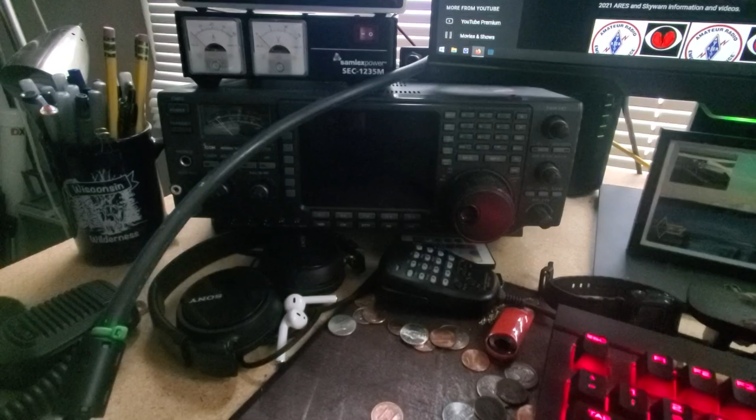Look at what I got, a RigExpert AA55 Zoom. Let's take a closer look at her. Maybe have some fun. Intro video.

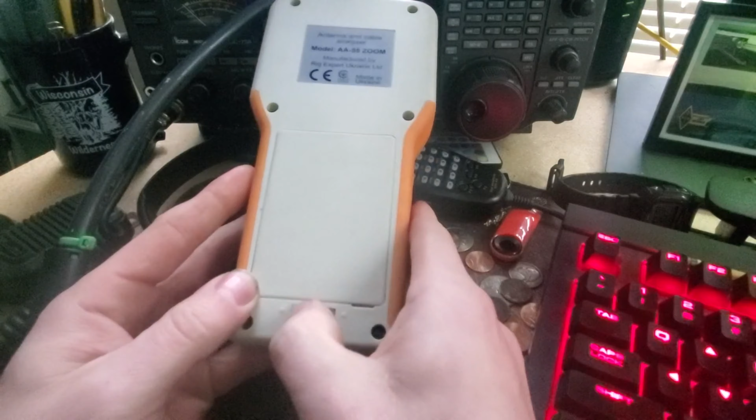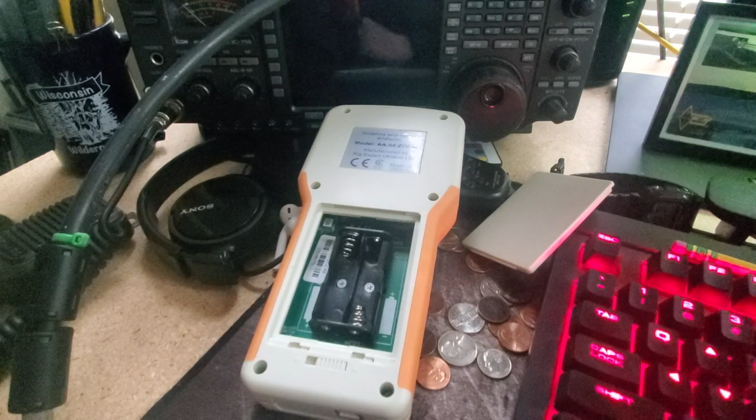Okay, so the first thing I'm going to do is replace the batteries in here. She runs on double As, which is great, everybody knows how much I love me some double As. Today I'm using the EBL lithium ions, 3000 milliamp hours. So we'll get those in there.

There we go. Next, turn around. Nice, beautiful screen there.

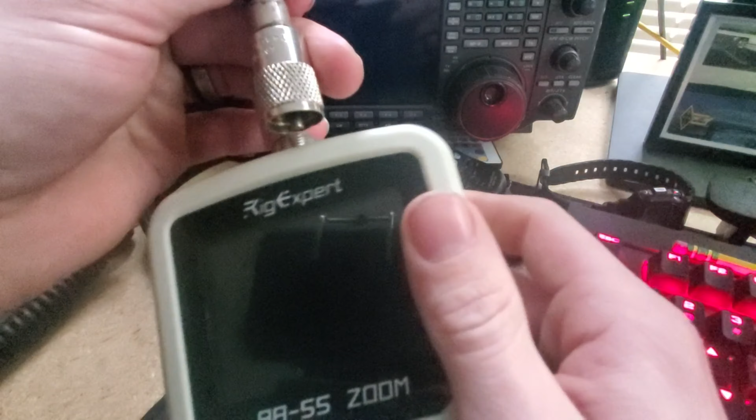The easiest thing to do with these is check out the SWR meter. So, nope, wrong button, power off. There we are. I got my off-center fed dipole on this here coaxial cable. Alright, so got the coax hooked up there. Turn her on.

Beep a beep. You have an SWR. Well, there's a lot of different options in here. You got a Smith chart, if you're super smart and know what that is and how to read it. You got an SWR chart. Let's take a look at that.

What's going on? Yeah, okay. Under the SWR chart, you're going to hit frequency range number 3. And it's pretty cool. What are we doing here? Range, frequency, F for bands. And F is down here. There you go. And that, oh no, you gotta hold it. And that's gonna highlight over here, and you can go down to pick whatever band you want.

I'm gonna start with 6, which is 52 megahertz with a 2 megahertz split, which maths out because you start at 50 megahertz and you go up to 54 megahertz, but 50 to 50.1 I think is CW, and all that jazz. So we're gonna hit check for enter, check for start, and it's gonna plot right there.

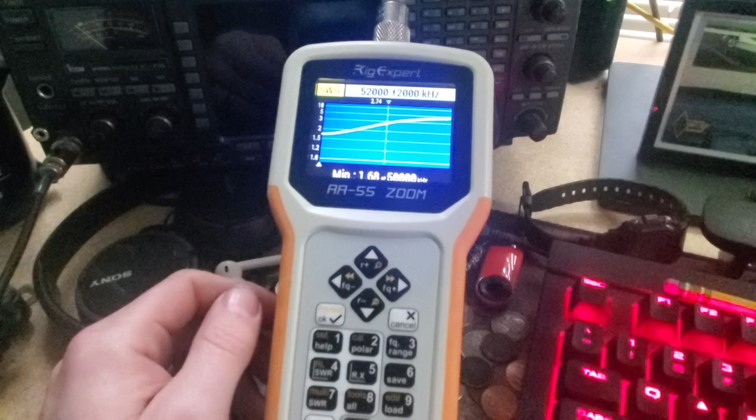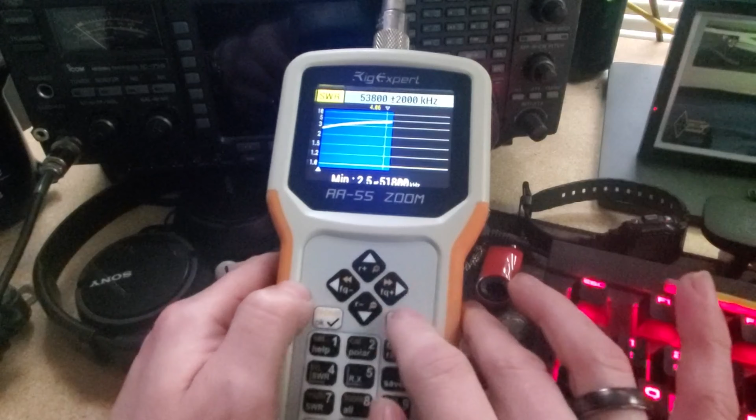Look at that. And that tells me that my off-center fed dipole is not really all that great on 6 meters. Usable maybe down here in the CW portion. I'm getting like a 1.6. Usable portions, it gets pretty high, almost up into the, yeah, that's unusable, man. But that's okay, just showing you how it works.

So how do I back out of here? There we go, I hit F3 for frequency range again, and then F to highlight there. We'll check it out on 10. And there we go, 10 is 28 to 29.7.

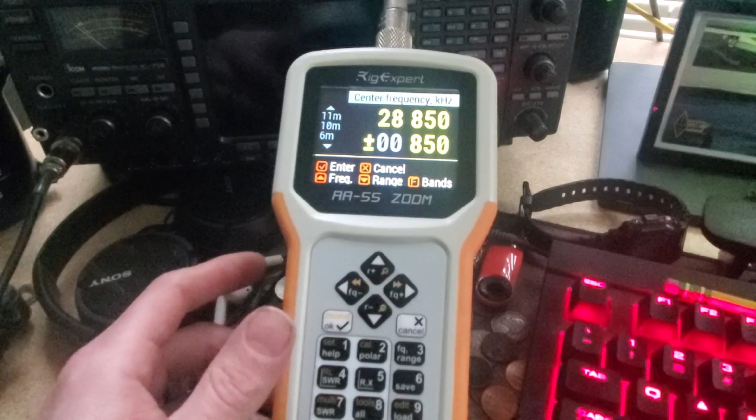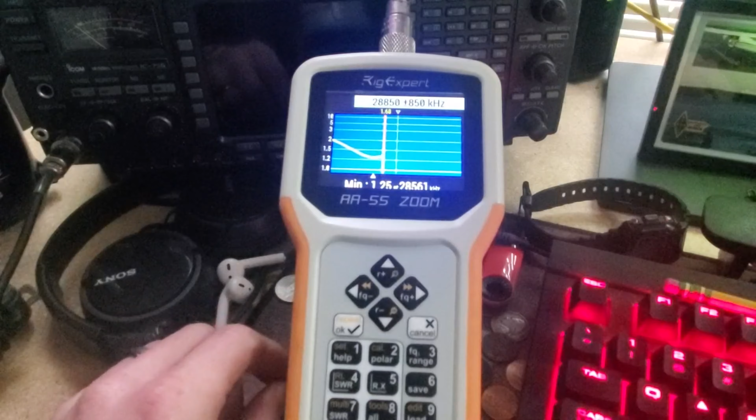But as a technician, you're going to get data from 28 to 28.3, and then a little bit of single sideband usage from 28.3 up to 28.5, I think. Oh, let's enter. And enter, check again for scan. And look at that, that looks a little bit better.

So we're going to go down to our lowest point, 28.561, which is outside of what you can do as a technician. So I really need to get this antenna a little bit better.

But anyway, hey, check it out. They call this the Zoom because you can use your ups and your downs, and you can zoom out, and you can see this is the 10 meter band and whatnot, so you can zoom way in and you can zoom way out. Yeah, I don't know, I'm not very smart with this, but yeah, it's cool.

I wonder what else we got here. No, what am I doing? Yep, F3 for frequency range, and then F. I'm gonna go down to all and search or scan the entire band, and each one of these blue vertical lines is a band, and that's what you get. So you can pick a band. It looks like the best one that I have is somewhere in the 10 meter space, 28.6.

But yeah, no, let's do some other stuff, shall we? Look, yeah, Smith chart. I don't know what that, I mean, I think that's on all of them right now. So, RX chart, which is, if you know what that is, I don't really know. You got an SWR meter, which is pretty handy if you have a, what's it called, the big ring, the mag loop.

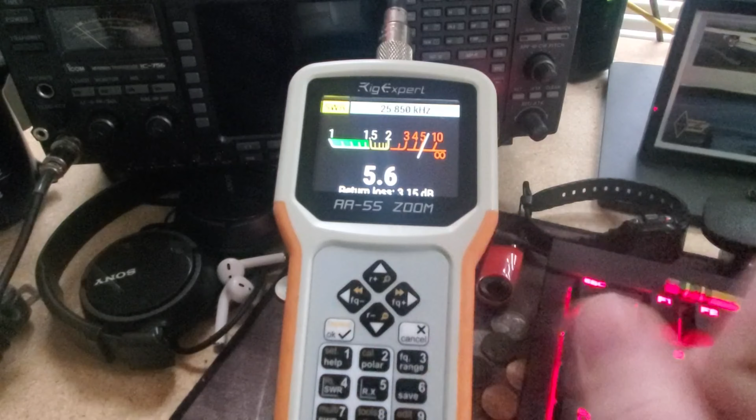If you have a mag loop or some sort of adjustable antenna like a ham stick, you can start and then just adjust your antenna, watching your little needle go up and down, trying to tune it in. That's what I usually do with my mag loop.

You've got all these parameters, I don't know what that is. You've got a setup, you can do some calibrations. You've got an RL chart, which is pretty handy.

And you can do multi SWR, and it's got a couple of tools, a stub tuner, a length, and this is really hard to read on camera. I'm going to go back, up to setup, and go to palette, and change the contrast. Whoa, no, what have I done? Inverted maybe? Hey, that looks a little bit better, that's a little easier to read.

So now that's easier to read. Setup. Language, battery, sound, system, user bands, Bluetooth right there. It's got a Bluetooth feature, which is currently off, so let's enable that.

I'm just now realizing that I'm using my phone to record, so let me go get another device and we'll play with Bluetooth. Okay, got my tablet here, let's go into the Play Store.

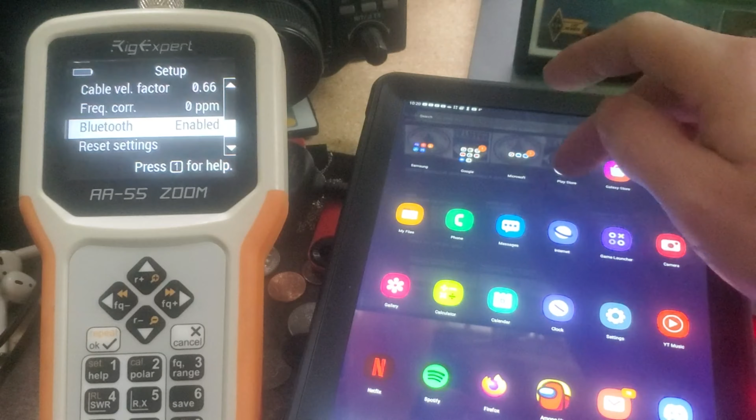AntScope, nope, spelling is hard. And there it is, right on top, AntScope from RigExpert. So we're going to go ahead and install that. Review your account, just stop with this crap, I don't want to add a credit card, I just want to download a flippin' app. There we go, nice, 10 hours later.

I'll be waiting. Oh, there we go, all right, so open. Access devices location, why do you need to know my location? Why do you need access to my media and devices?

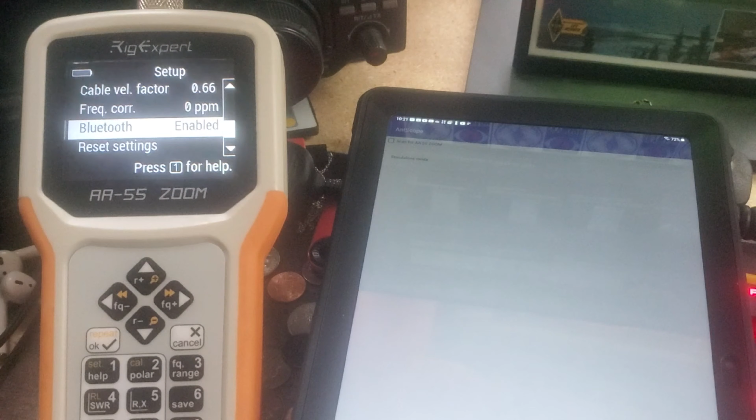Comes up right away, scanning for AA55 Zoom. No idea why it's scanning for the Zoom 55 versus anything else, I don't know, but it knows.

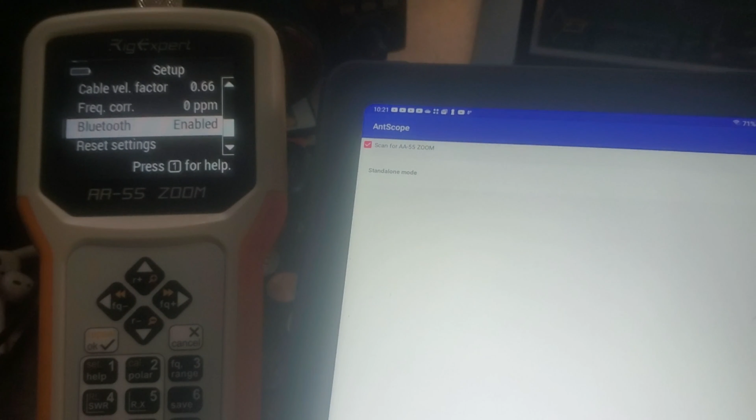So I'm going to hit that, and there's a little Bluetooth thing in the corner going as it scans. So there we go, what's going on? Why you no worky? Do I have Bluetooth turned on? Come on, come on, yeah, I got Bluetooth turned on.

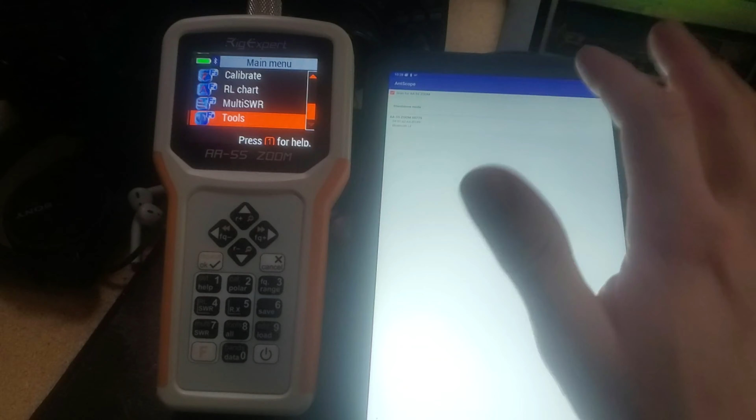Okay, folks, I figured it out. The AntScope application requires you to have location turned on on your device, and I didn't because the government and the earth is flat, nanobots and stuff of that nature. But anyway, it's fine, it's cool.

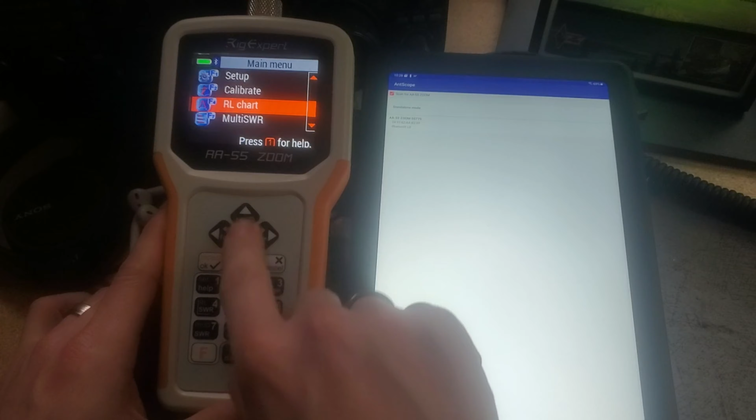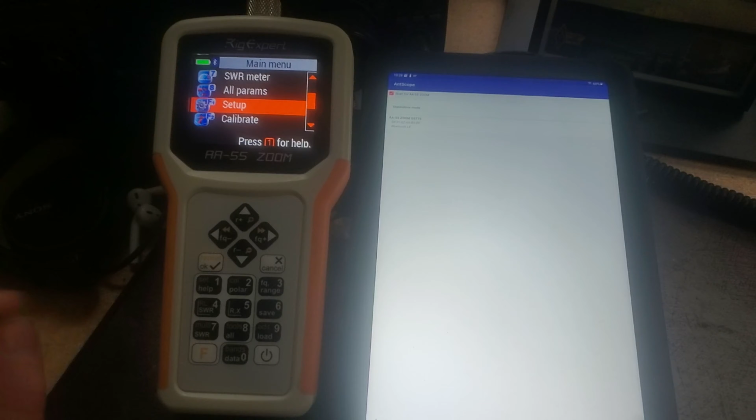Also, on the RigExpert, if you're within the setup menu, it turns Bluetooth off, so you actually have to back one level out of it to the main menu in order for the Bluetooth to turn back on. So it's not perfect, but hey, I'm not complaining, not in the least bit.

So we did a search and that looks like rubbish. We got our AA55 Zoom here, so we're going to click on that, and along the top we have SWR, phase, Z equals R plus JX, and a bunch of what looks like math type stuff, an RL chart, and a Smith chart. So let's go ahead and do a quick SWR.

Let's push the button to start measurement, so we're going to push that button. And there's no change on the screen here, I mean, I can still navigate and whatnot. So we're just going to set her aside and focus on...

Does this work sideways? It does, that's amazeballs. Give me a minute, fix camera. I know what I'm doing, really, I do. Okay, so that probably looks like hot garbage, but how do you focus?

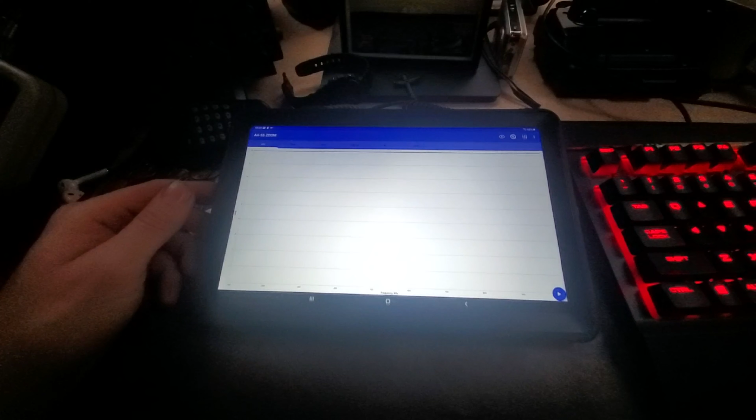No, this one, just need to tilt a little bit more, that's all. I need more, well, this has a tilty function. Silly me, silly me. I'll be waiting when... there we go, that might work.

What? Bluetooth timed out, you have unsaved measurements. What? No, don't, why did you time out? Maybe you have to do something in the whatever menu. Okay, so those, why are you beeping again?

I don't know, anyway, so you can choose from a start, stop, or a center range. So we can have a slider here, and you can see your frequencies.

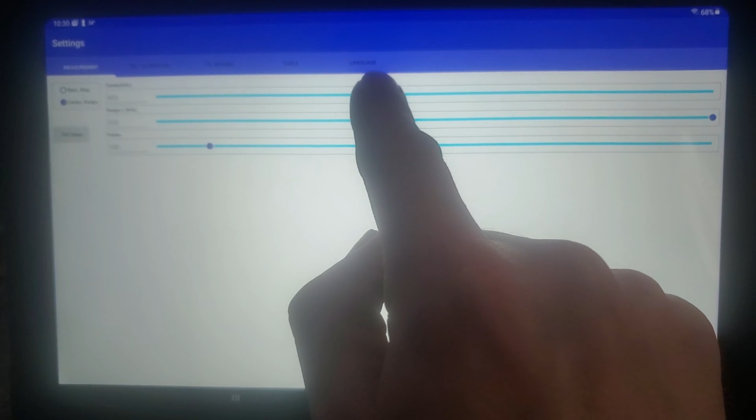It does not like to focus. Come on, focus. I need a pointy McPointer thing, I need a pointy thing. Okay, so I got my pointy McPointer here.

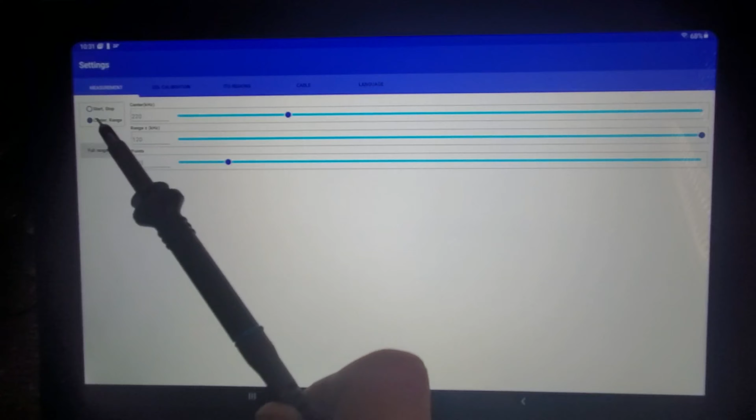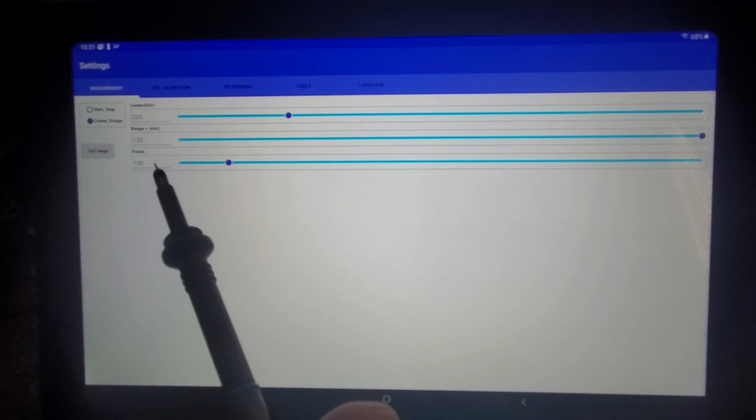So on this side you have start, stop, or center range, where you're defining what you want to scan. Over here we have center, range, and how many points you want, all on a slider. So let's go to, what is it, 6 meters. Start, stop, start at however many kilohertz.

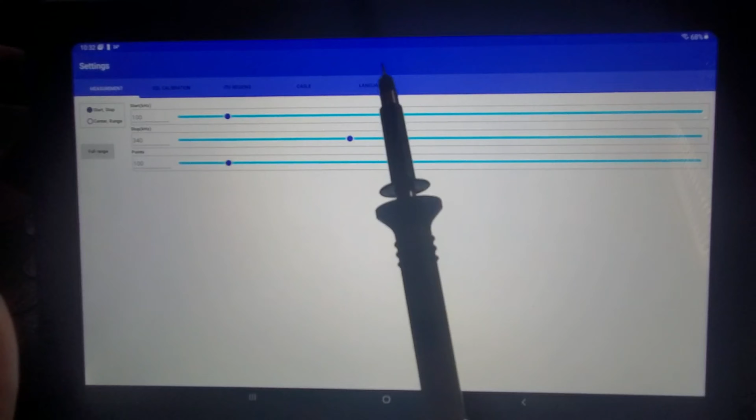Oh crap, now I gotta do math from kilo to mega. Just give me megas, can I just go to megas? Why don't you give me megas? I'm gonna click full range.

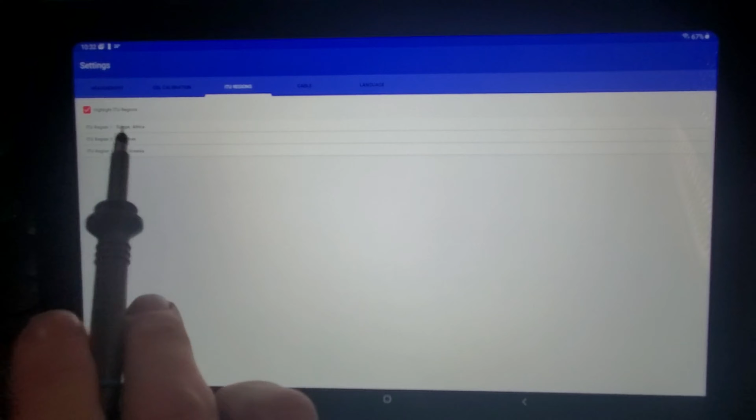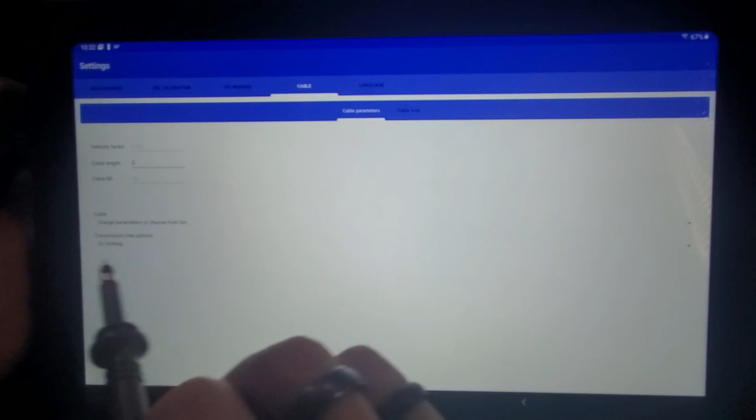And then you have OSL calibration, open short load, I know what that is, it's like a nano VNA and stuff. You got your ITU regions, whether you're in Europe, Africa, Americas, or what have you. I'm going to go with Americas, because that's where I live. You can input your velocity factor, cable length, and some other information I don't understand. And then you can also do your cable losses.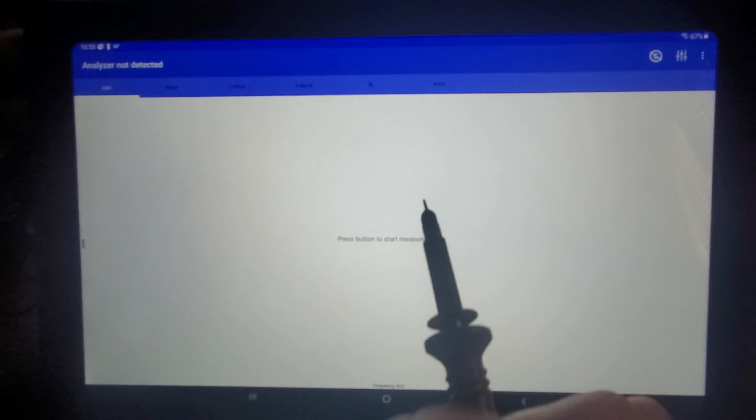Attention, Bluetooth timed out again. Why do you do that? All right, so we'll try again. Shabang, all right, SWR and push button to start. What button do I push? There's no button here, is it this button? Push button, stop timing out. No, it says analyzer not detected. I think that's a problem with the tablet, not the RigExpert. Okay, figured it out.

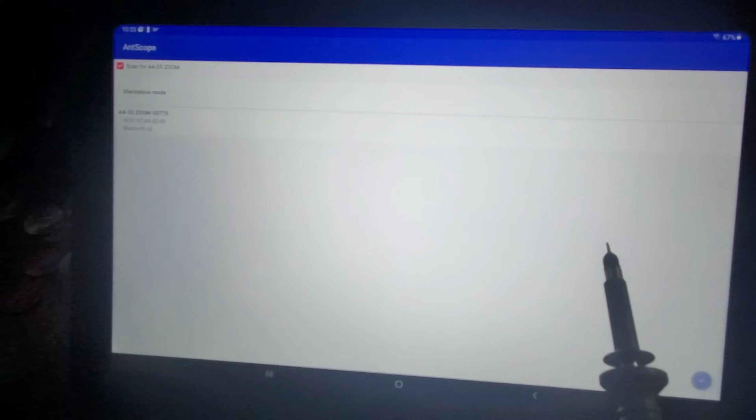It says AA-55 there, we got the little play button down here, so let's do an SWR sweep. The play button, and it's just going right along the top. Because I don't even know what frequencies I just swept.

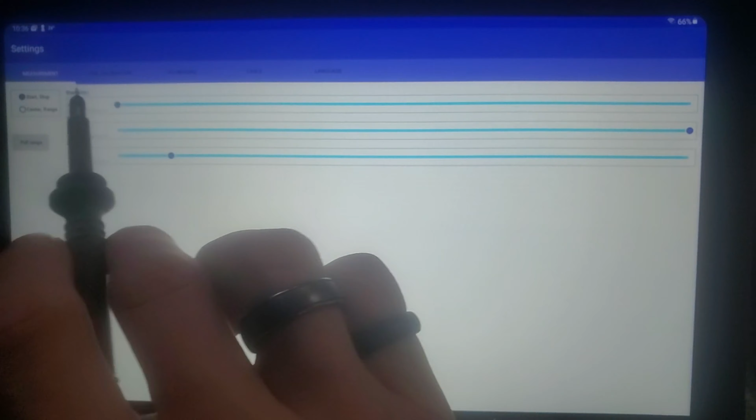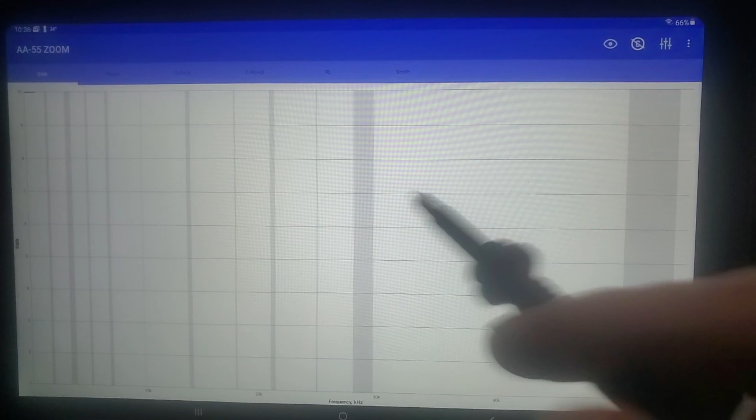So let's go back over here, we're going to start at 60 hertz. Right, I guess. I don't know, go back. There we go, now we got some vertical liney McLines here. So we'll do a sweep. Hey there, look at that.

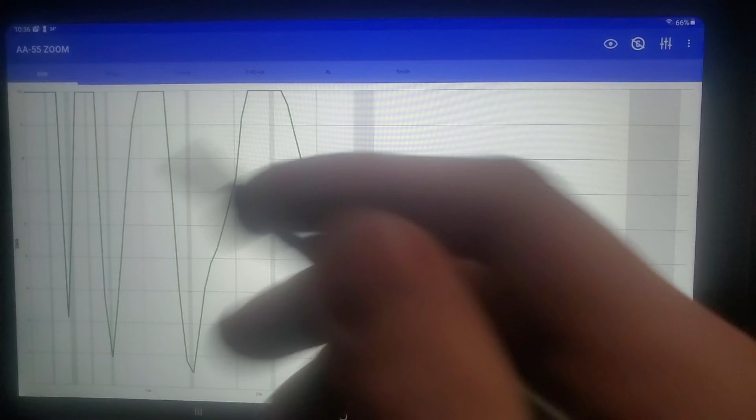Now it's doing something cool. All right, what do we got here? So each one of these is most probably a band. I wonder if I can grab a certain spot. It might be hard to see, but there's like a vertical and a horizontal. So if I hit right there, it's going to say my frequency is 31,378.8 kilohertz with an SWR of 5.55.

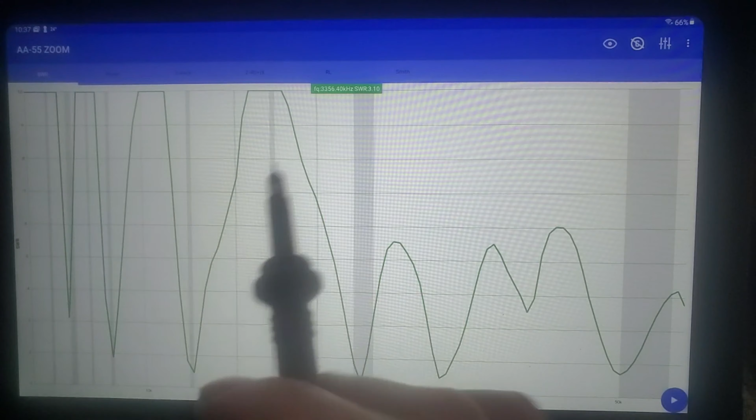Would really like that to kick up to megahertz, but what do I know. I'll go down here, what is this, right down there. That's going to be 3,356.40 kilohertz, which is like what, 3 kilos or something, 3 megas I mean.

So that's somewhere in the 80 meter band. So the 80 meter band is going to be this one here, and then I don't know what, 60, 40, sliver of 30. This will be 20, and what's next? Is it 17 and then 15, 12, 10? Yeah, because 10 is bloody huge. What is that? That must be 6. I don't know, let's check it out.

Go over there, what is that? Yeah, because that's 51.703.

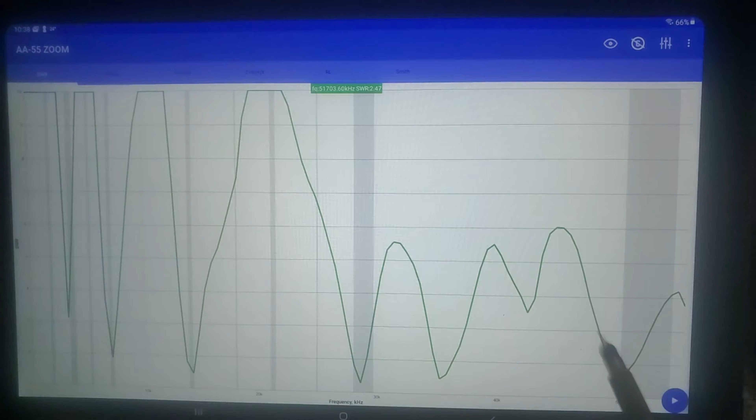Yeah, anyway, so you can scan your, apply your SWR. Here you have phase. Look at all that phase. Sorry, I have no idea what that is.

Someone, if you want to put a comment, or maybe if one of the smarter folks ever actually watches this, do a video on phase. I have no bloody idea.

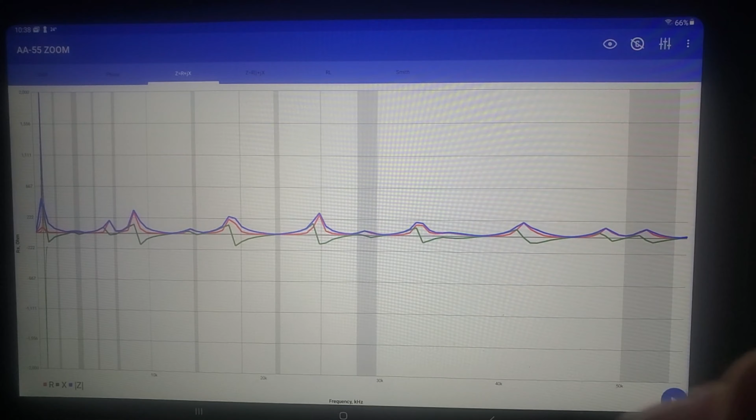We have Z equals R plus JX. That looks scientifical, no idea what it is. Z equals R, I don't think those are even English letters. But hey, look, more scientifical stuff. RNL, RNL Electronics, I'm sure it's something else. This is probably, what's it called? I am smart-ish, maybe.

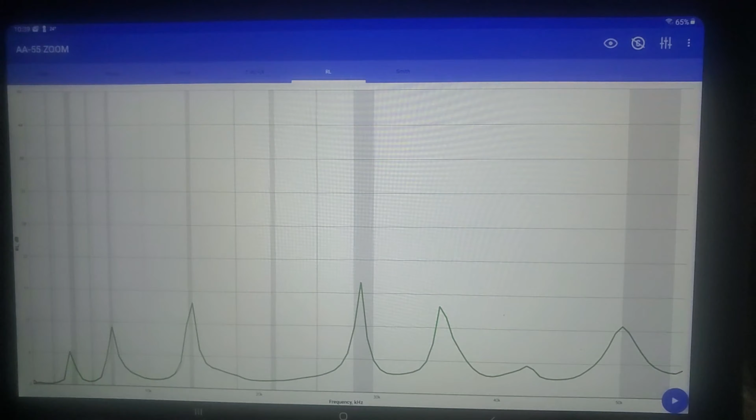Resonance, I think this is resonance. So you can see the peaks of where your antenna is resonant and where it's not. Because you got R and dB over here, and you got frequency in kilohertz down here. And you got Smith chart. What do these three buttons do? Load, take analyzer data, 1 FQ frequency, disconnect.

Maybe I can go into settings, no, that's just this. Hit back. It just goes to settings as well. Am I hitting the right thing there? Yeah, I don't know, C with a line through it, I don't know what that means. You got an eyeball.

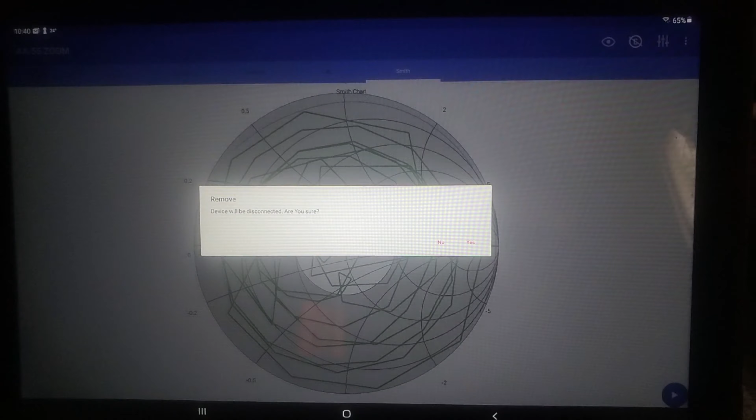So SWR is usually, well, at least it's what I would do with this, and it's what I use this for. Let's figure out if we can actually just do a single band sweep of SWR.

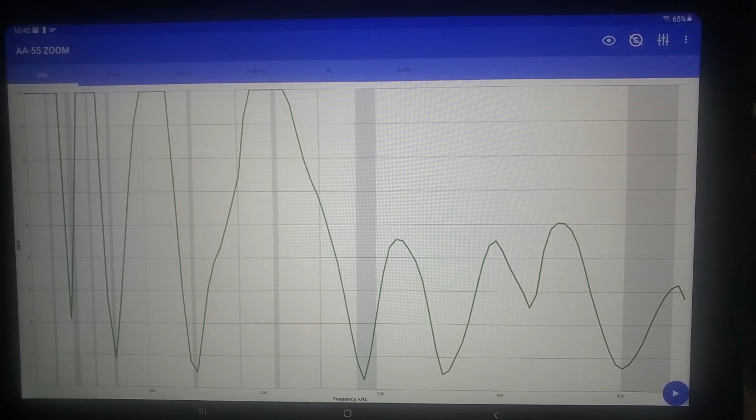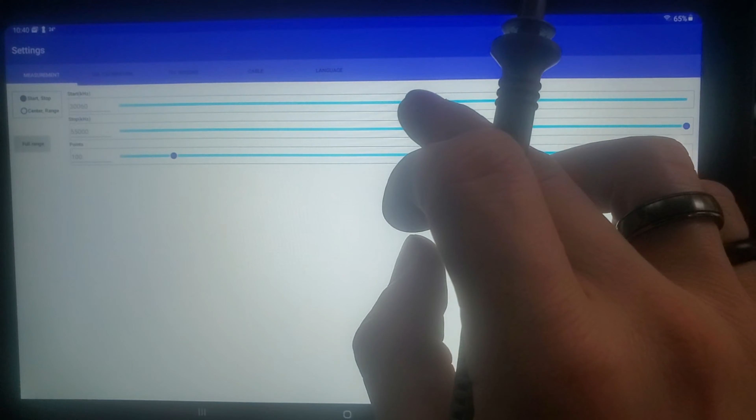SWR, me mateys. So start stop range, start at 60 kilohertz. It's ridiculously low. No, I think I'm figuring this out. So 50 megahertz would be 50,000 kilohertz? Is that how math works? I don't know. Oh, I can. Oh, look at that.

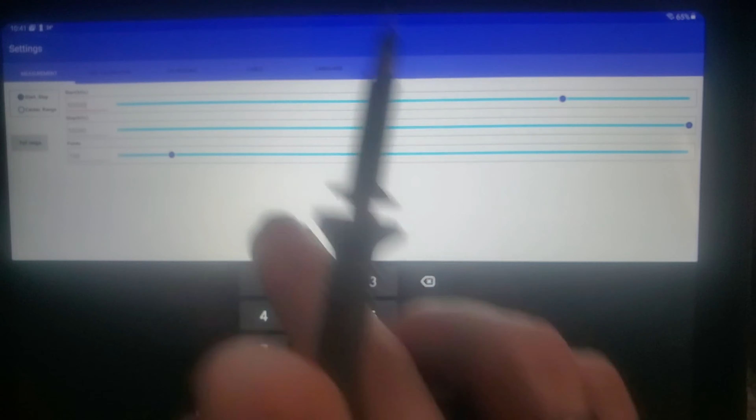So let's go 50, 1, 2, 3 zeros. And stop at, what was the end of 6? 54, 1, 2, 3 zeros. We'll do 100 points. Done. That looks maybe right. So we'll go back and scan.

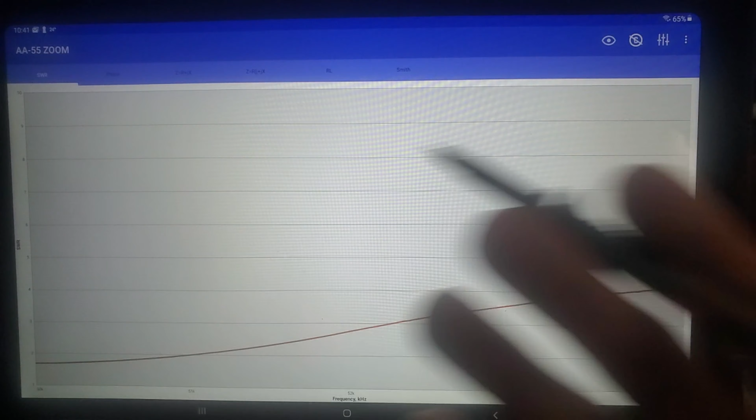But 1 megahertz is 1,000 kilohertz. So 50,000 kilohertz would be 50 megahertz. So this is our 6 meter band, right? And you have SWR here. 1's here, 2, 3, 4. So 4 on the high, 1 less than 2 down here.

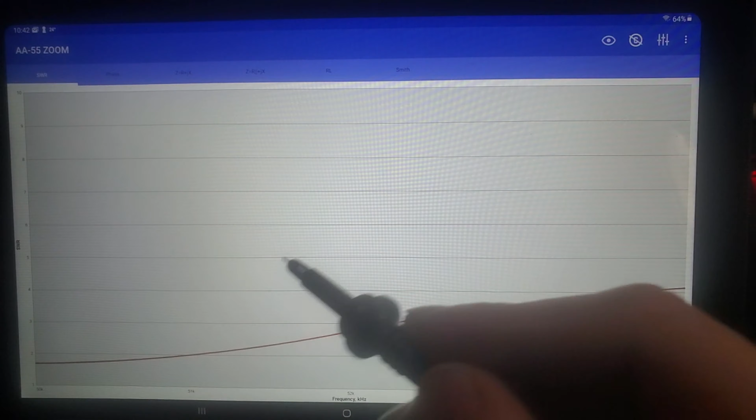This is pretty handy. I mean, if you have something a little bit more, if you're tuning something in, or if you want to get a little bit finer resolution versus using the tiny screen on here, this is actually pretty cool. So I dig this.

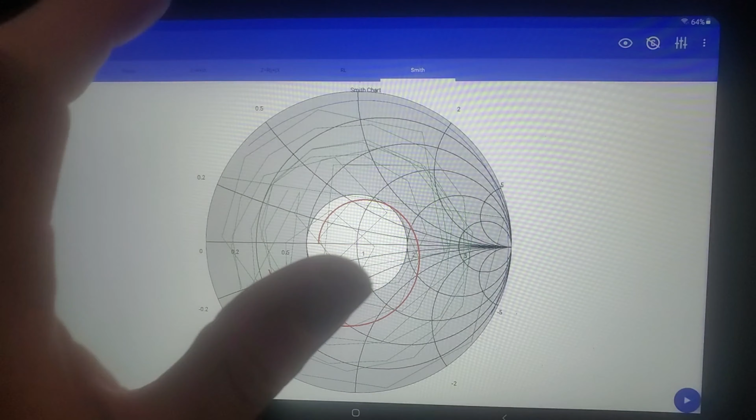It does things like this. Smith chart. What's up? Yeah, resonance. And these math functions, look at that. That's some TI-86 in algebra class looking stuff, man. I don't know, but it's room to grow, and I can learn all sorts of fun stuff maybe later on. Check out that phase line, man.

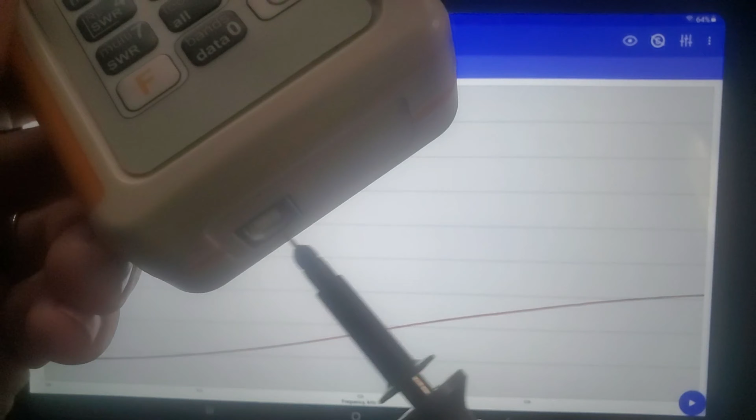Anyway, so this is the software, AntScope, A-N-T. You can get it on your PC as well. There's a little, where's the camera? There it is. There's a USB type B connector on the bottom there that you can put into your PC and probably do it on there, but I'm not going to bother with that because this is what I would use out in the field when I go to play the POTA if it ever warms up in Wisconsin.

Because it's cold as expletive here right now. But this only, what is this, the 55? So it goes up to 55 megahertz there. So it cannot do the 2 meters, the 1.25, 70 cm, 33 cm, 23 cm, you know. You can get these RigExperts that go that high, but holy cats, man, they get expensive.

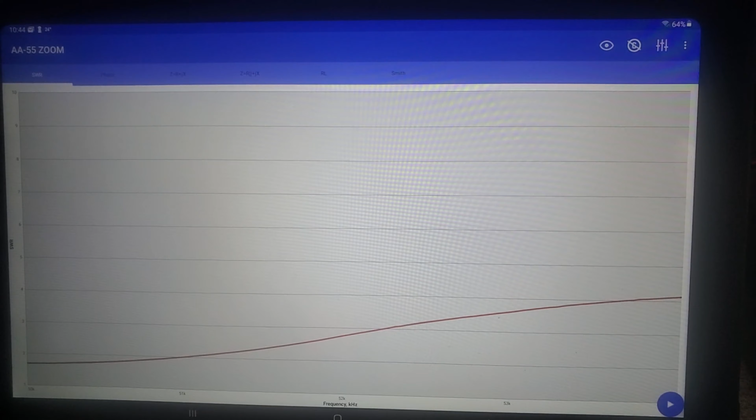This is the software. I just wanted to play with it. I wanted to futz with it. I lost my pointer device.

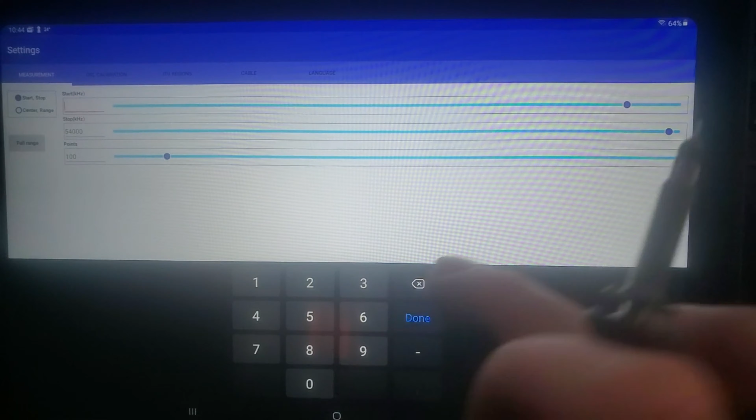Let's do 10 while we're here, let's do 10, those ones. And 10 is going to be for what a tech can use. Let's erase all of that. A 28 megahertz, right? So 28. And then from megahertz to kilohertz, just add 1,000, which is 3 zeros.

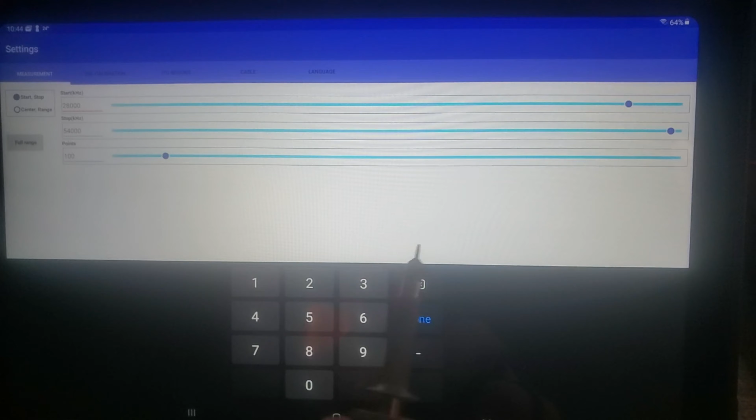Starting off down in the data portion. And then what, 28.5, so that's just 28,500. I'm going to increase the points this time, which I'm presuming max is 1,000, which I'm presuming is how many data points along the scan there are. So let's max that out.

Let's go done. Let's go back. Let's go. Look at her go. I imagine the more data points that you request or have it do, the slower it takes. It's taking a wee bit of time to get going here.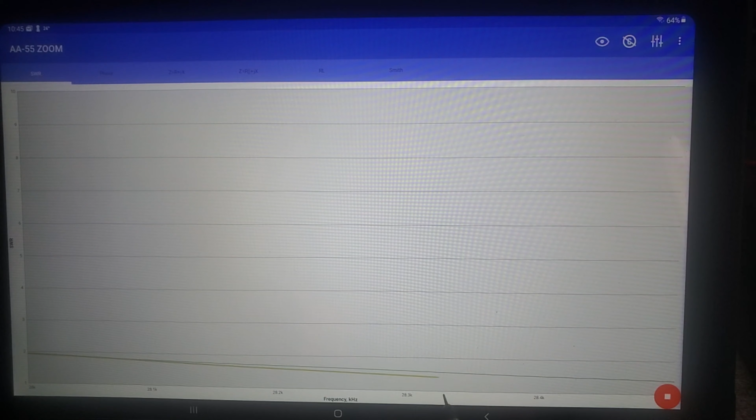Well, I mean, she's going, but go ninja, go ninja, go. Go ninja, go ninja, go, go. Y'all remember Vanilla Ice? Any songs? Yeah. That was on the Turtles movie, man. That stuff was the bomb.

Anyway, so if we're looking at our SWR here, this top first line is 2.

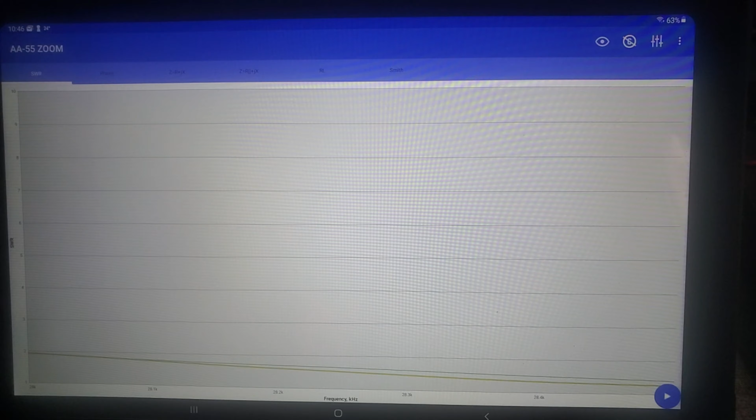So across our entirety of data and single sideband usage on 10 meters, this antenna's pretty good. There's 2 thumbs up!

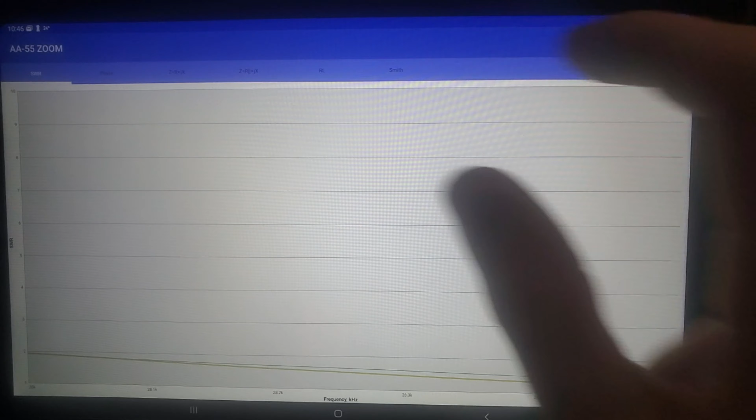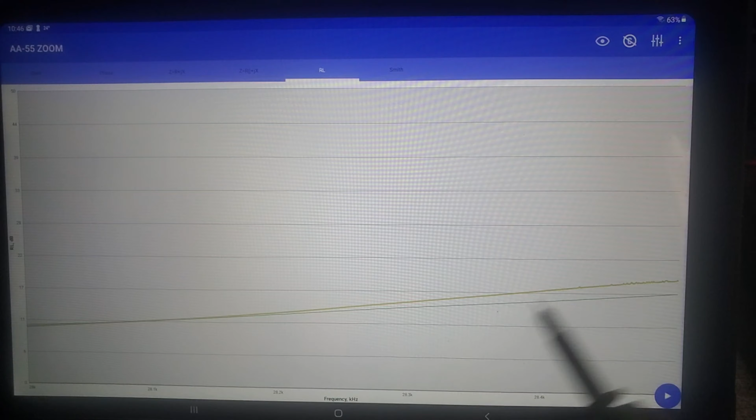What else can you do with this software? Let's look at a Smith chart. I mean, what the, there's so many lines. Let's look at RL. All right, so that's a thing. Of course, that's stupid, why would I do that?

Phase. Hey, no, you know what? There are folks in this world who are technicians and they can do the CWs, the beepity beep beeps. So let's check for those good folks.

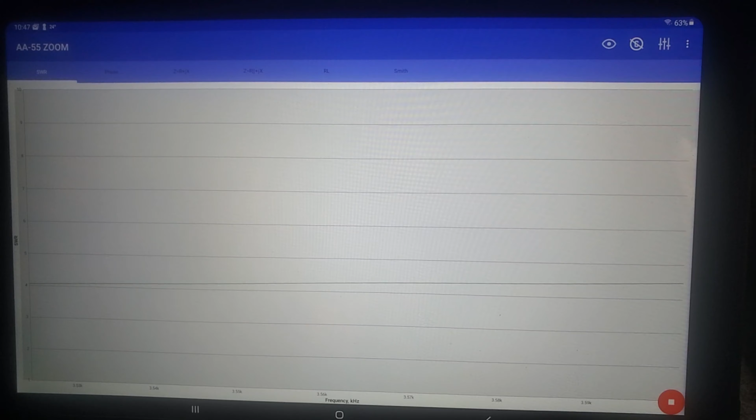3,500 kilohertz? No, what is it? 5, it's 3525 maybe, if I remember correctly. And then we're gonna stop it at the end, which I think is 3.6 mhz. So it's a wee section down towards the bottom of 80 meters that as a technician you can use for the CWs. Yeah, look at that. Beautiful. Super low, man.

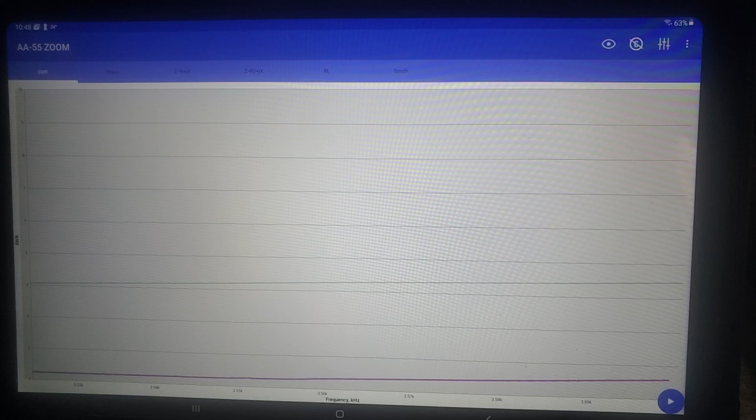Oh, looks like she went up just a little bit. This is exciting stuff, guys. Oh, she keeps going up, man. There we go, all right. So we got down here in the corner. We got our play button back, so she's probably done scanning. But yeah, look at that, man. If you're into Morse code here on 80 meters, this antenna is a pretty decent antenna for that.

I really wish that there was a way to change that from saying kilohertz there to megahertz. That'd be great. Anyway, techs get a bit on 40 and some on 15, but nothing on 20. We can't do anything above 6 meters, so I think that's about it. I think that's really all I can do.

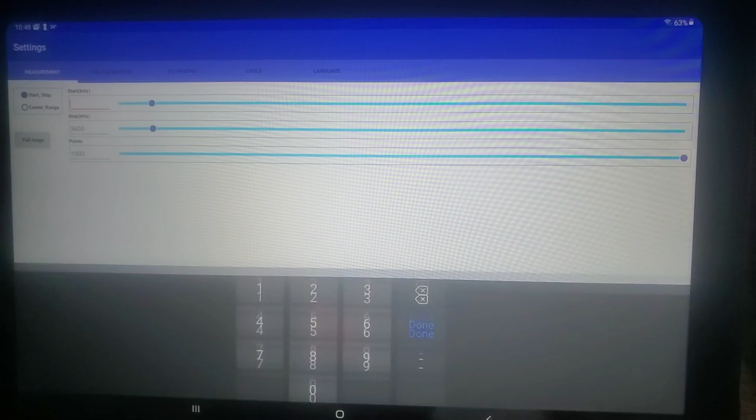What does this little eyeball here do? I don't even know what all that is. Maybe I was wrong before about what that is. I don't know. Hey, RTFM, man, read the manual, you slob. Nah, I don't do manuals, man, manuals and I don't get along. I'm just kidding. No, don't disconnect, please.

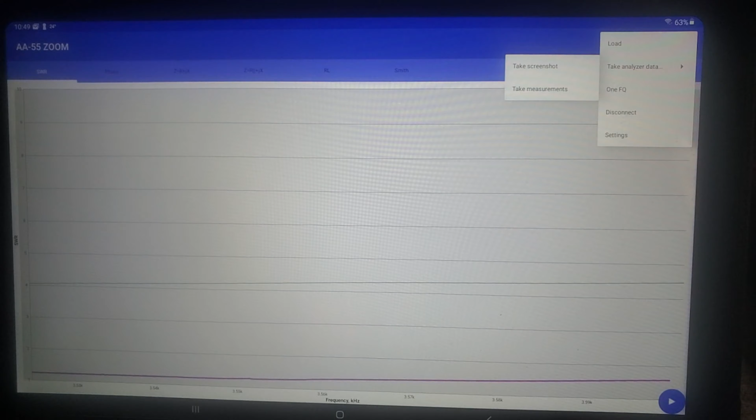Load, analyzer data. Oh, you can look at this. You can take a screenshot. You can take a measurement, load stuff. One freak— oh, I think this is one frequency. So you can put one frequency in, and you can measure SWR and RL. And look at all this.

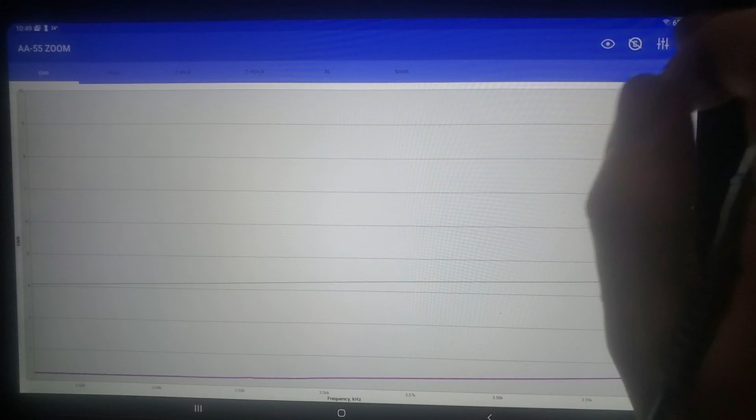FEP Labs, explain this to me, man, or Ape, or TO, or Dude, or just somebody who's smarter than me. And settings just brings us back to here, and I didn't see anywhere that let me change it from kilohertz to megahertz. But it ranges from, I think, as low as it goes is like DC or just above, probably, all the way up to 55 megahertz.

So it's probably better that it's set up to run in kilohertz, because if you're a general or an extra or anything of that nature, you're probably working down 80, 40, 30, 20, which is all of the, well, those are megahertz too. I don't know, I don't know what I'm talking about. I need to end this video before I say something dumb and embarrass myself.

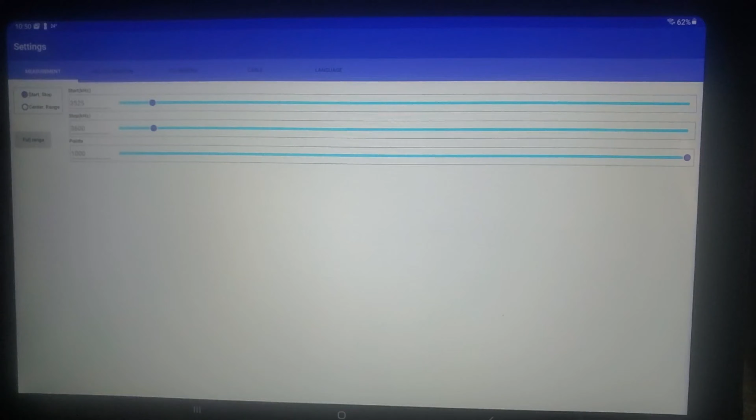But hey, look what I got. Okay, cool. Yeah, I got the AA55 Zoom. I got the software running on Bluetooth on a cheapo Samsung Galaxy Walmart job. So that's cool, the AntScope software.

I just kicked the camera. Come on, man. Amateur hour.

But yeah, no, it's decent software. I mean, it does what it's supposed to do. I'm sure there's a lot more capabilities and things that it can do that I don't understand yet, or that I'm misrepresenting. If that's the case, sorry.